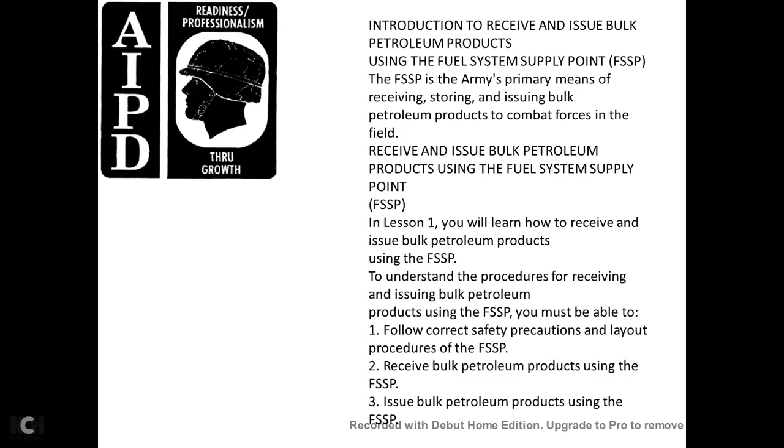be able to follow the correct safety precautions, lay out the fuel system supply point, receive bulk products using the fuel system supply point, and issue petroleum products using the fuel system supply point. Learning event number 1: how to follow the correct safety precautions.

Lay out the procedure. Safety precautions: whenever working with petroleum products, there is a risk of fire. The danger can be reduced by following the proper safety precautions during all phases of the operation. Primary precaution: prohibit smoking near the fuel system supply point. Post no smoking signs so that anyone entering or working in the supply point can see the signs immediately.

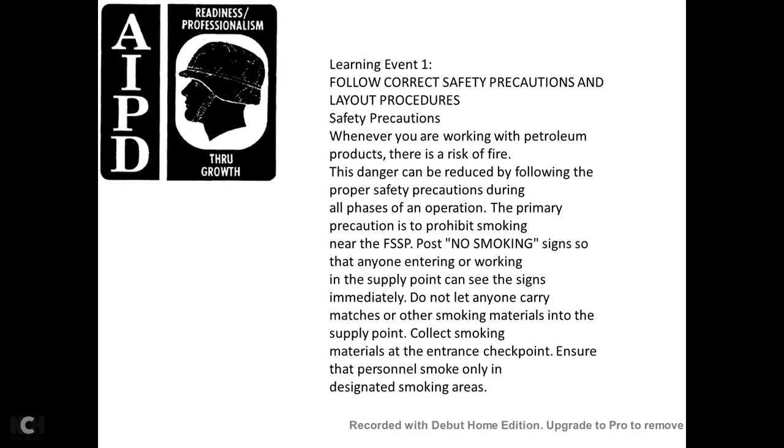Do not let anyone carry matches or smoking materials in the supply point. Collect smoking materials at the entrance checkpoint, and ensure that personnel smoke only in designated smoking areas. Place fire extinguishers at all receipt, storage, and issue points. All fire extinguishers must be operational and inspected daily. Ensure the equipment is grounded. Follow the proper grounding and bonding procedures during fuel transfer operations.

If enemy attack, an electrical storm, or fire occurs in the immediate area, stop operations immediately. Disconnect all the pump hoses and move all the vehicles out of the area. If possible, if a fire breaks out over the manhole of a tank vehicle or over the dome of a railway tank car, stop the transfer operations and close the manhole dome cover. This will extinguish the flames.

Do not permit welding, open flames, or lights other than approved explosion-proof flashlights within 100 feet of any receipt, storage, or issue operation. When operating the pump, if you see sparks, stop the pump and inspect all the grounding and bonding connections. Make sure the connections are bare with metal-to-metal contact. If you cannot find any faulty connections, look at the power equipment in the area to find the possible cause of the stray current.

Maintain a distance of at least 25 feet between tank vehicles during receipt and issue operations. Also keep all tractors coupled with the semi-trailers while the product is transferred. This allows the semi-trailer to be moved quickly in an emergency. The canvas top of the tractor must cover the driver's compartment while the vehicle is loading or unloading product. This keeps the inside of the tractor from being splashed with fuel.

Do not use a nozzle equipped with a locking device. If the nozzle is equipped with a locking device, disable the locking device before use. Ensure the nozzles are attended constantly during refueling. Take all precautions possible to prevent spills, using drip pans whenever the hose is being connected or disconnected, and repair all leaks immediately. If needed, replace defective hoses, gaskets, and valves.

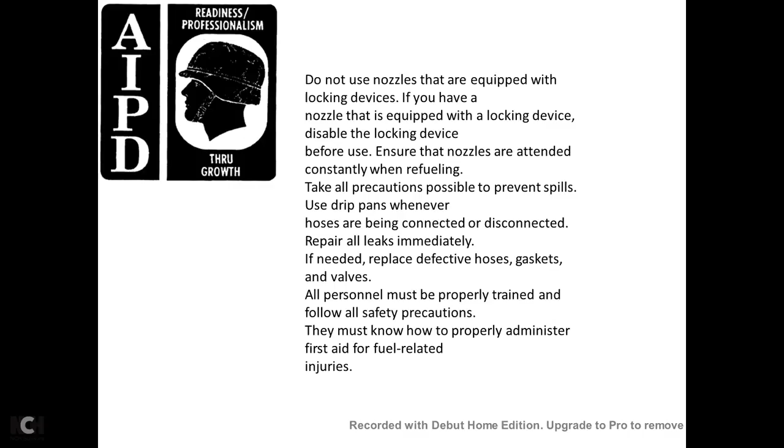All personnel must be properly trained and follow all safety precautions. They must know how to properly administer first aid for fuel-related injuries. Layout procedure of the fuel system supply point.

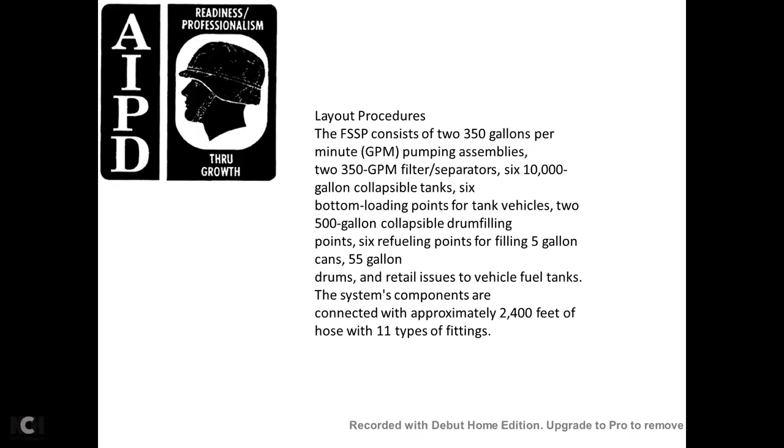It contains two 350 gallon per minute pumping assemblies, two 350 gallon per minute filter separators, six 10,000 gallon collapsible tanks, 6 bottom loading points for tank vehicles, 2 500 gallon collapsible drum filling points, 6 refueling points for filling 5 gallon cans or 55 gallon drums, and retail issue to vehicle fuel tanks, with system components connected with approximately 2,400 feet of hose and 11 types of fittings.

The fuel system supply point is designed to be flexible in layout. The system layout depends on the needs of the mission and the variables of the terrain. You must lay out the system and identify the components needed. For example, if your mission does not include the filling of 500 gallon collapsible drums, then you do not include the filling points in your layout.

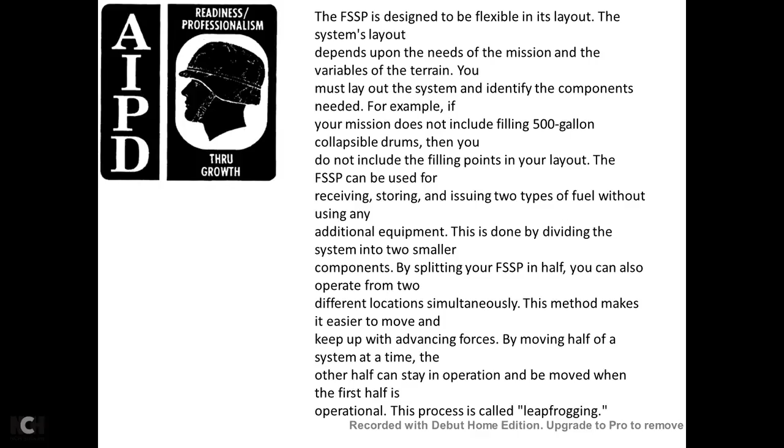The fuel system supply point can be used in receiving, storing, and issuing 2 types of fuel without using additional equipment. This is done by dividing the system into 2 smaller components by splitting your fuel system supply point in half. You can also operate at 2 different locations simultaneously. This method makes it easier to keep up with advancing forces by moving half of the system at a time. The other half stays in operation while the first half moves; this process is called leapfrogging.

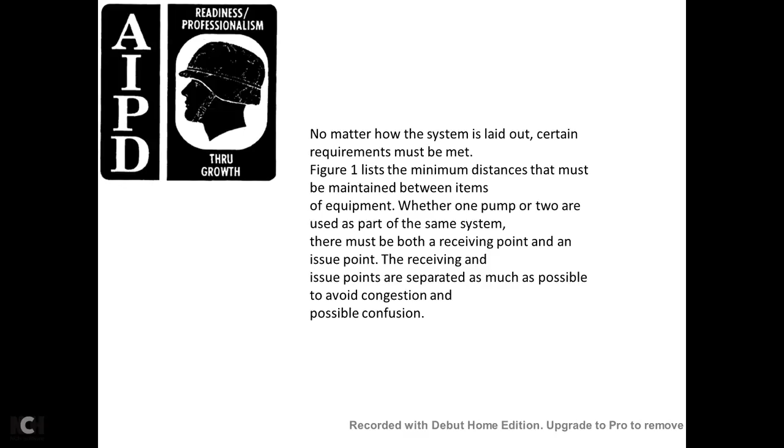No matter how the system is laid out, certain requirements must be met. Figure 1 lists the minimum distances that must be maintained between the items of equipment. Whether one pump or two are used as part of the same system, there must be both a receiving point and an issuing point. The receiving and issuing points are separated as much as possible to avoid congestion and possible confusion.

Figure 1 shows the usual distance between the components of the fuel system: supply point receipt manifold to receiving pump, 60 feet; receiving pump to manifold on the first tank, 60 feet; 10,000 gallon tank to 10,000 gallon tank, 40 feet; manifold of last tank to the discharge pump, 60 feet; discharge pump to the filter separator, 40 feet; filter separator to fuel servicing nozzle, 60 feet.

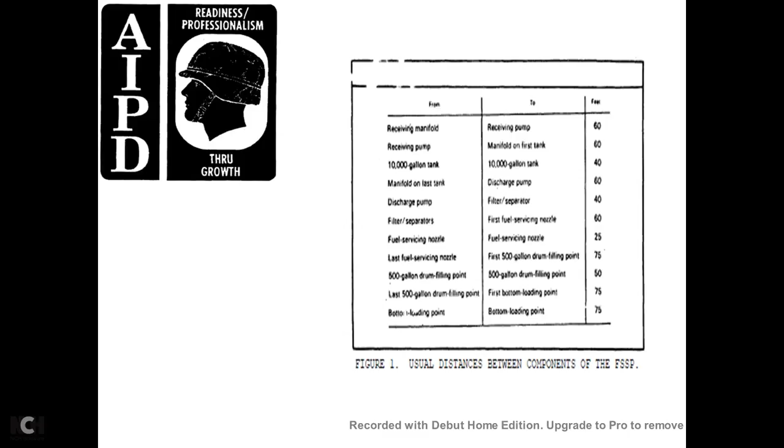Fuel servicing nozzle to fuel servicing nozzle, 25 feet; last fuel servicing nozzle to the first 500 gallon drum filling point, 75 feet; 500 gallon drum filling point to 500 gallon drum filling point, 50 feet; last 500 gallon drum filling point to the first bottom loading point, 75 feet; bottom loading point to bottom loading point, 75 feet.

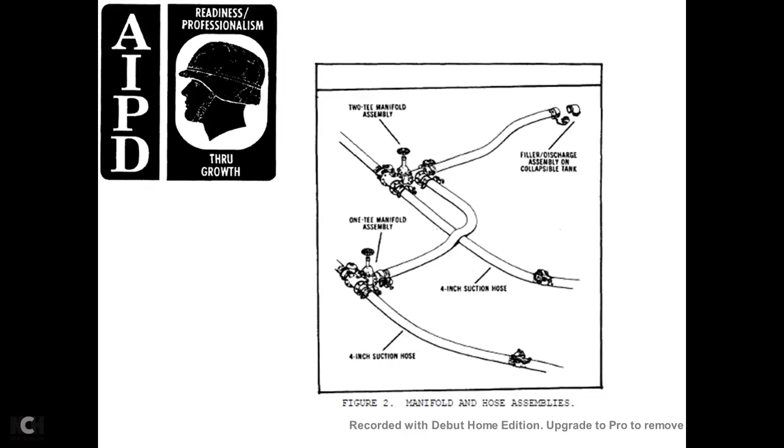The basic setup for the tank manifold remains the same regardless of the number of tanks used for the layout design. The manifold for each tank must be assembled so that fuel can be received and issued, because the 10,000 gallon collapsible tanks have only the filler discharge. The basic manifold for each of the tanks is shown in Figure 2. Figure 2 shows the manifold hose assembly with a two-tee assembly headed to the filler discharge assembly of the collapsible tank, over to the one-tee manifold assembly in 4 sections with two 4-inch suction hoses.

Various ways of laying out the complete fuel forward supply system are shown in Figure 3. Lay out the system the best way possible for the specific situation. After you decide how to lay out the system, you must prepare the areas where the tanks will be positioned. Pick up all the loose debris.

All the collapsible tanks will be surrounded with a firewall. The firewall must be large enough to contain the entire contents of the tank plus one foot of freeboard empty space. To meet this requirement, the firewall must be 26 by 26 feet inside. The firewall must be 3 feet high and 8 inches wide at the top of the berm. Figure 4 displays a berm in construction.

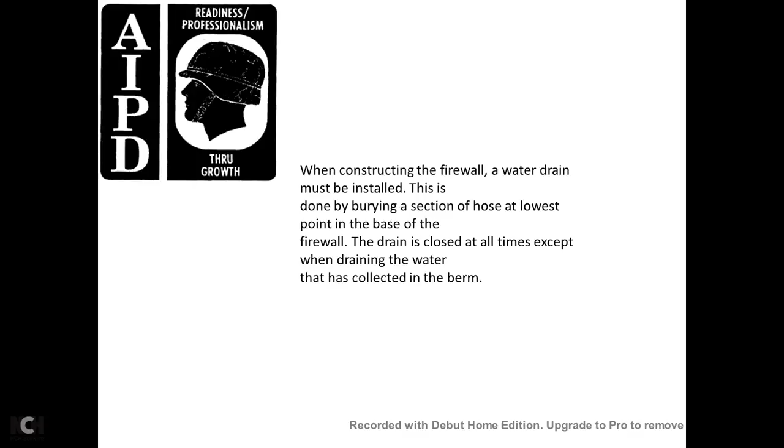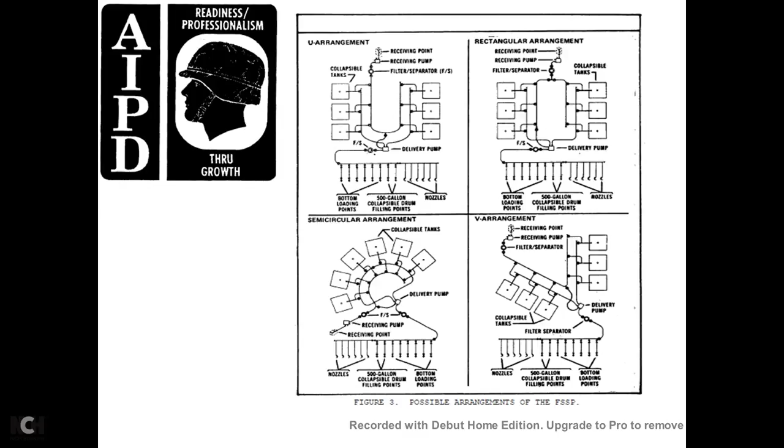All right, your semicircular arrangement goes from the receiving point and receiving pump to the filter separator, to the semicircular arrangement, back to the delivery pump and the fuel supply, going to the nozzles, 500 gallon collapsible drum filling points, and bottom loading points. The V arrangement is a receiving point, receiving pump, and filter separator to the V arrangement with the collapsible tanks, then to the delivery pump, to the filter separator, to the nozzles, 500 gallon collapsible drum filling points, and bottom loading points.

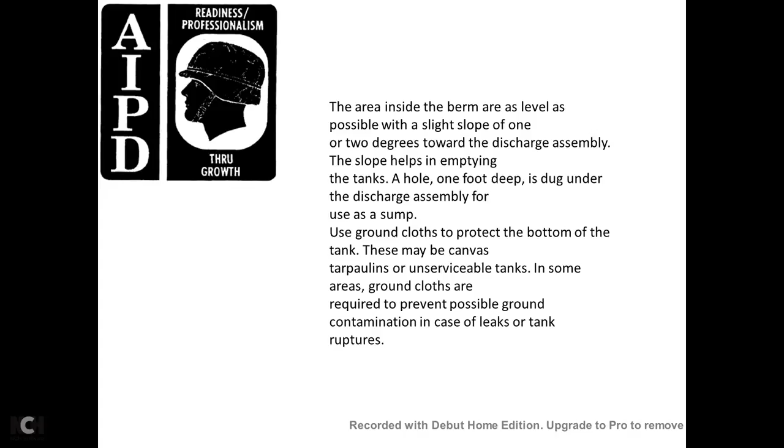The areas inside the berms are leveled, with a possible slight slope of 1 to 2 degrees toward the discharge assembly. The slope helps empty the tank. A hole 1 foot deep is dug under the discharge assembly for use as a sump. Use ground cloths to protect the bottom of the tank. These may be canvas tarpaulins or unserviceable tanks. In some areas, ground cloths are required to prevent possible ground contamination in case of leaks or if the tank ruptures.

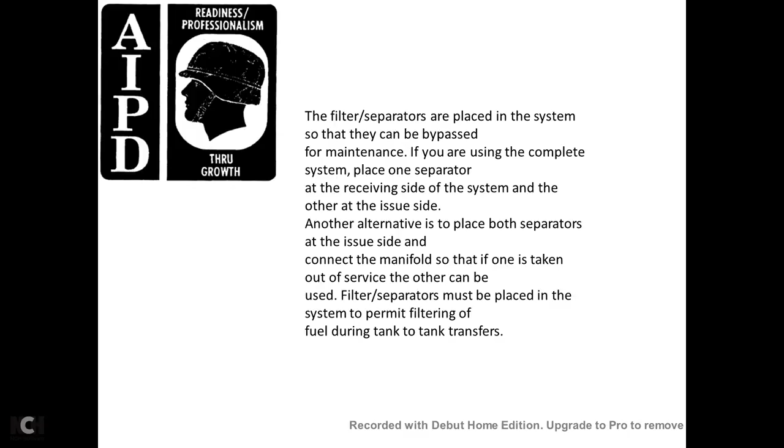Filter separators are placed in systems so that they can be bypassed for maintenance. If you're using the complete system, place one separator on the receiving side of the system and another on the issue side. Another alternative is to place both separators on the issue side, connected by a manifold, so that if one is taken out of service the other may be used. Filter separators must be placed in the system permitting the filtering of fuel during tank transfers.

When personnel are laying out the hoses for the system, ensure that they only remove the dust caps and plugs when ready to make the connection.

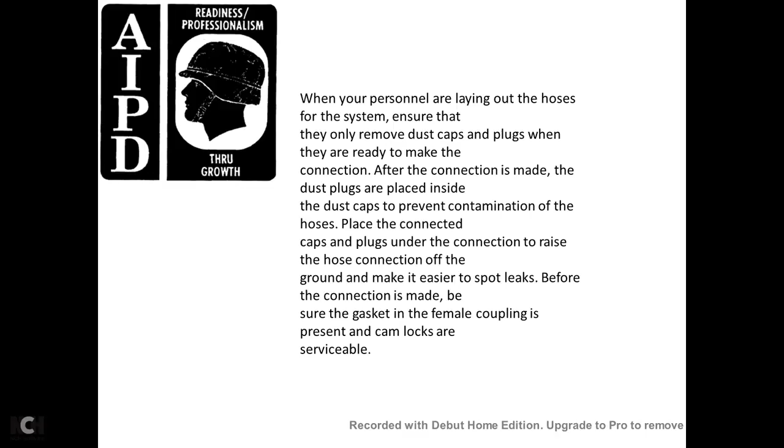After the connection is made, the dust plugs are placed inside the dust caps to prevent contamination of the hose. Then place the connected caps and plugs under the connection to raise the hose connection off the ground and make it easier to spot leaks. Before the connection is made, make sure the gasket in the female coupling is present and cam locks are serviceable.

Learning event 2: receiving bulk petroleum products. Follow the procedure to avoid interruptions. Prepare the receiving schedule before the products arrive. Know the type and amount of the product as well as the date and time of arrival before receiving the product. Inspect the pumps, filter separators, hose, valves, and fittings for cleanliness and good working condition. Check the collapsible tanks for cleanliness and damage, and available space for the product receipt. Do this before the product arrives at the location.

When the transporter arrives, position it so that no strain is put on the hose connection when spotting. If unloading more than one transport at the same time, make sure there are at least 25 feet between them. Bond and ground the transport. Compare the seal number on the transport with the number on the shipping documentation to detect tampering. If there's a broken seal or seals that do not match the shipping documentation, notify the proper authorities. Do not unload or use the product until it has been gauged, sampled, and tested.

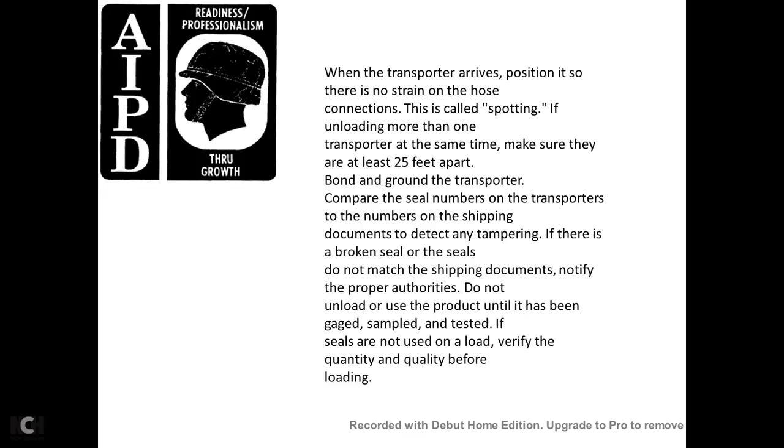If the seals are not used, verify the quantity and quality before unloading. Inspect the transporter for leaks. If the transporter is leaking, place a drip pan to catch the leak. Unload the fuel at once and be sure to clean up any spilled fuel immediately.

Unload tank vehicles. Before starting the unloading operation, make sure the vehicle and the major components of the supply point are bonded and grounded. Place the drip pan under the manifold of the vehicle before making the connection. Make sure that you have a fire extinguisher near the receiving point. Follow the safety precautions. Connect the suction hose to the discharge port of the vehicle. Assign someone to watch the level of the product in the vehicle. Make sure the manhole stays open during the operation.

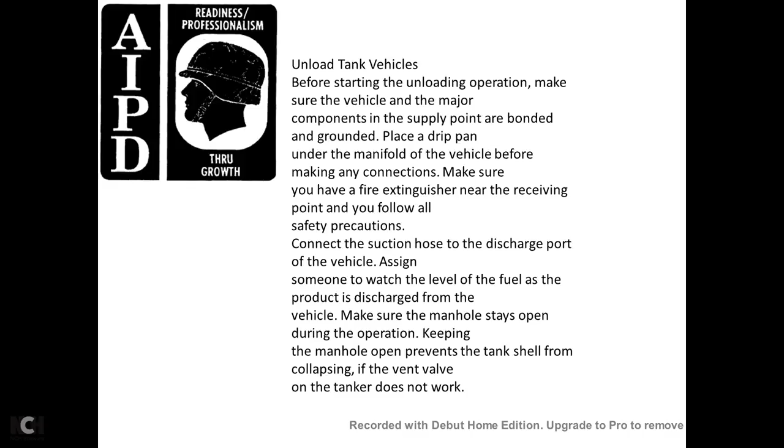Keep the manhole open to prevent the tank shell from collapsing if the vent valve on the tanker does not work. Open the discharge valve of the tank and the suction valve of the 350 gallon per minute pumping assembly of the fuel system supply point. Start the pump and idle at the appropriate speed for 3 to 5 minutes.

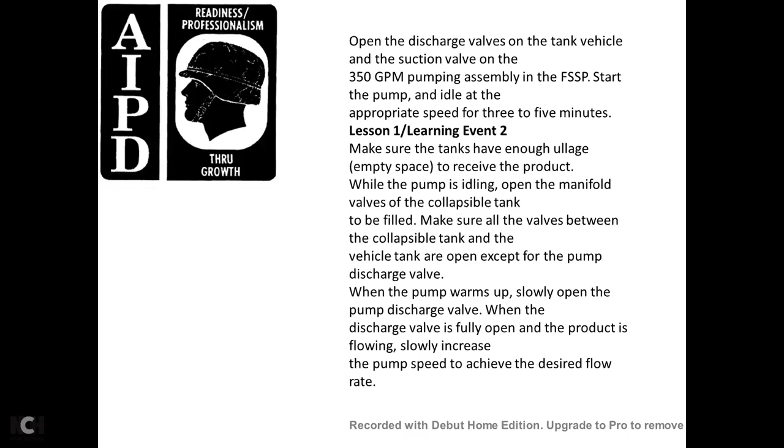Lesson 1, learning event 2 continued. Make sure the tanks have enough ullage, empty space, to receive the product while the pump is idling. Open the manifold valves on the collapsible tank to be filled. Make sure that the valves between the collapsible tank and the vehicle are open, except for the pump discharge valve. When the pump warms up, slowly open the pump discharge valve. When the discharge valve is fully open and the product is flowing, slowly increase the pump speed to achieve the desired flow rate.

While the tank vehicle is unloaded, check the hoses, valves, pumps, and receiving tanks for leaks. Place a drip pan under any leak and stop the operation immediately. Make any necessary repairs before continuing the operation. When the transporter is empty, idle the pump engine, then close the discharge valve and allow the engine to idle for 3 to 5 minutes before turning it off. Close the pump suction valve, close the manhole, and close all the valves. Disconnect the suction hose and the ground wire from the vehicle. Move the vehicle away and prepare for the next operation.

Unloading tanker cars: you may be able to set up the fuel system supply point close enough to the railroad track to receive product from railway tanker cars. This allows large shipments of fuel, which frees vehicles on the main supply route to move other materials. When receiving product from a railway car, use standard procedures for spotting railway cars. After spotting, set the brakes and chock the wheels. Place a sign reading 'Stop, tank car connected' between the rails at least 25 feet ahead of and behind the railway car.

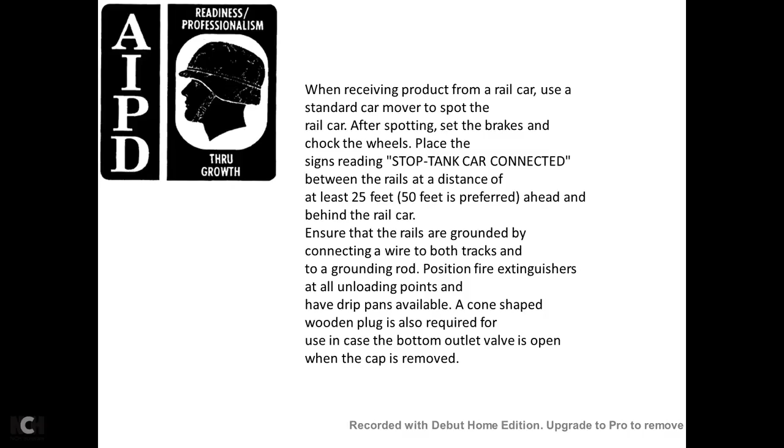Ensure the rails are grounded by connecting a wire from both tracks to the ground. Position fire extinguishers at all unloading points. Have drip pans available, and a cone-shaped wooden plug, which is required in case the bottom outlet valve is open when the cap is removed. When the rail tanker car is in position and grounded, make a quick inspection for leaks. Receive the railway car.

If you receive a railway car that is leaking, place a drip pan under the leak and unload the car as soon as possible. Perform preliminary steps to ensure that the product is suitable for use and has not been tampered with. Unload the railway tanker car through the bottom outlet valve unless the valve is broken, and unless the proper adapter for the railway tanker car is not available.

In this case, unload the car from the dome with a suction hose. When opening the manhole cover on the railway car, stand on the upwind side, avoid breathing the fumes.

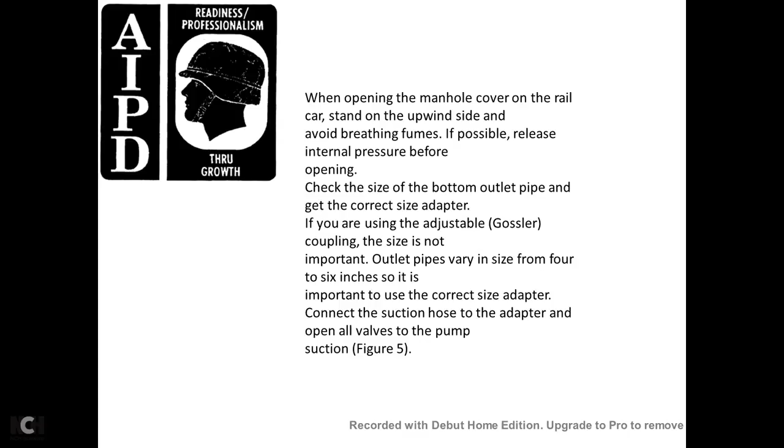Connect the suction hose to the adapter and open all the valves of the pump, as shown in figure 5. Open the pump suction valve, start the pump, and idle the pump 3 to 5 minutes while it is idling.

Open the valve between the pump and the discharge, receiving tank, having one person monitor the fuel level in the tank being unloaded. As the pump engine warms up, slowly open the discharge valve and increase the pump speed to the desired flow rate while transferring the product.

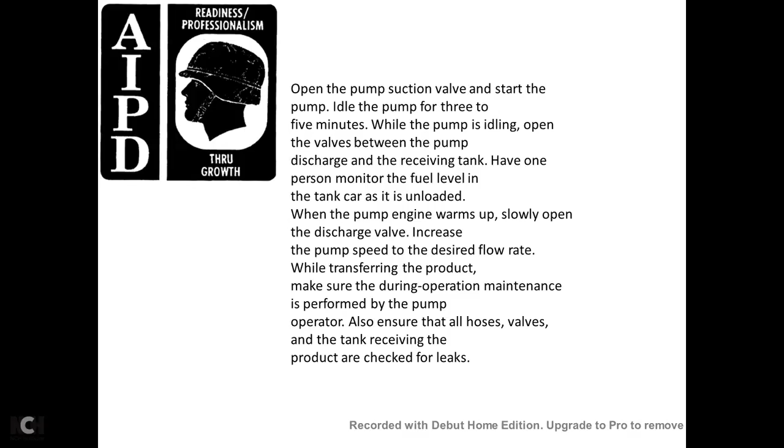Make sure that during operation, maintenance is performed by the pump operator. Also ensure that all hoses, valves, and tanks receiving the product are checked for leaks. If a leak is found during unloading, place the drip pan under the leak, stop the operation, and make the necessary repairs before resuming the transfer operation.

When the railway tanker car is empty, slowly bring the pump engine to idle speed. Close the pump discharge valve and allow the pump to idle for 3 to 5 minutes before shutting it off. Close the suction valve and close the bottom outlet valve of the railway tanker car.

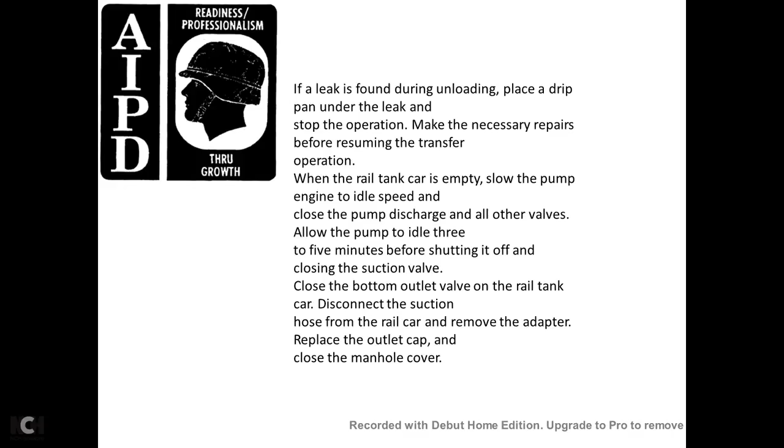Disconnect the suction hose from the railway car, remove the adapter, replace the outlet cap, and close the manhole cover. On all sides of the railway car, diamond-shaped cards say flammable. Remove the cards and replace them with dangerous empty cards. Some of the cards are printed on both sides, in which case flip them over.

Disconnect the ground wire from the rail car. Release the brakes and remove the chock block. Remove the car from the transfer area and notify the proper authorities that the car is ready to be removed.

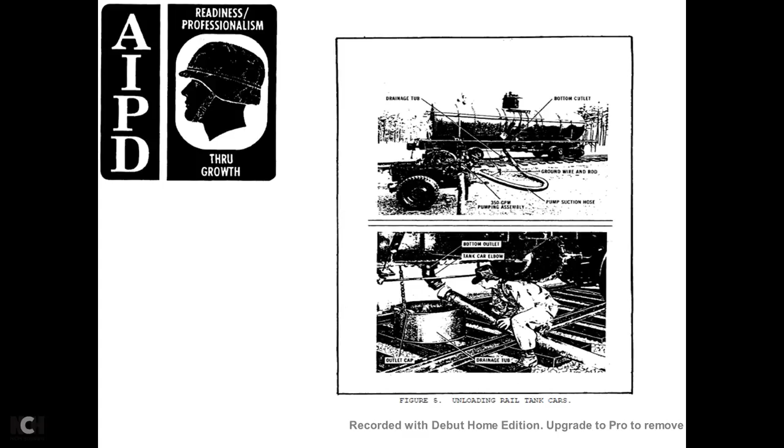Figure 6 shows unloading the railway tanker cars. The top picture shows a damaged drainage tube, a 350 GPM pumping assembly, a pump suction hose, a grounded wire and rod, and a bottom outlet. The bottom outlet has a tanker car elbow and the drainage tube connects into an outlet cap and a drainage tube.

Receipt of the product through the assault hose line. In some cases, the receipt of the product for your fuel system supply point uses an assault hose line, as with the railway tanker, which has the advantage of freeing up the main supply route.

For other types of supply, there's an added advantage of being able to receive more product into your system, assuming there's an adequate source at the other end of the hose line. The assault hose line usually connects directly into the manifold system on the discharge side of the receiving pump.

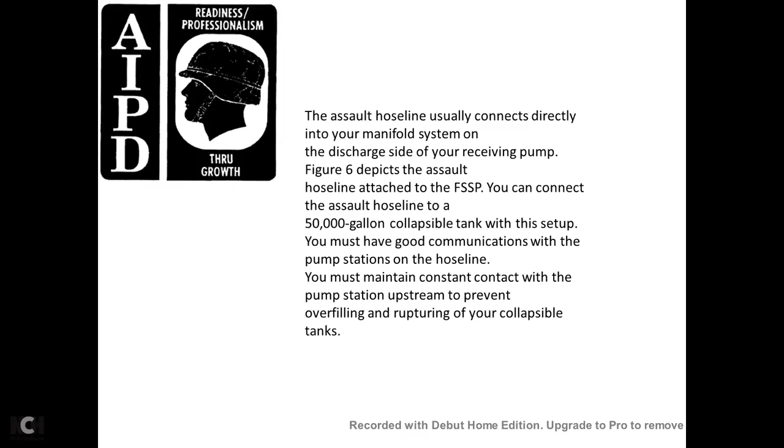You will receive pumping orders before the operation begins. Pumping orders tell you when the operation begins, how much fuel you will receive, and how long the pumping operation will take. Upon receiving the pump order, ensure that you have enough ullage for receiving the designated quantity.

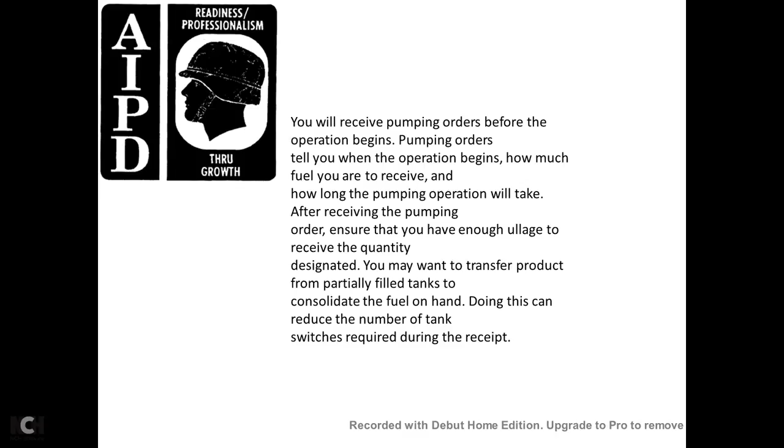You want to transfer the product from partially filled tanks to consolidate the fuel on hand. Doing this reduces the number of tank switches during the receipt. Once you have decided which tanks are to receive the product, you can determine the valves that need to be opened. Remember that when switching tanks, you open the valve to the next tank before closing the valve to the first tank. Failure to follow this procedure results in overfilling or rupturing the tank.

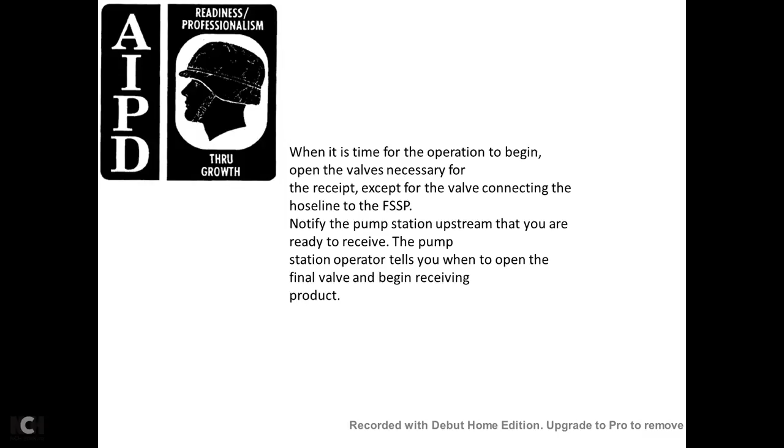When it is time for the operation to begin, open all valves necessary for the receipt, except for the valve connecting the hose line to the fuel system supply point. Notify the pump station upstream that you are ready to receive the product. The station operator tells you when to open the final valve and begin receiving the product. When the product starts arriving at the fuel system supply point, check hoses and valves for leaks.

Observe the collapsible tank to be sure that it is receiving the fuel. Send out a patrol to inspect the hose line for signs of leaks, tampering, or sabotage.

If you receive a large amount of fuel and the fuel system supply requires more than one tank, once the receiving tank is almost full, open the valve necessary to start the flow of product into the next tank so product flows into both tanks. Wait until the first tank is completely filled before closing its valve to allow flow into the new tank. Continue in this manner until you have received the entire quantity.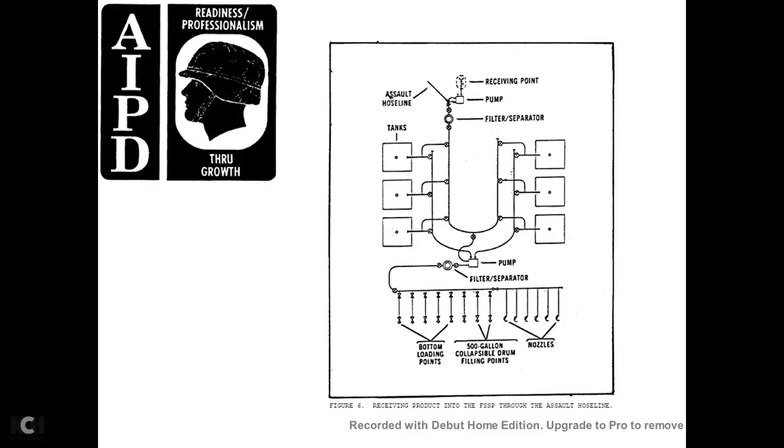Figure 6 shows the product moving from the forward supply point through an assault hose line to the receiving point at the pump, through the assault hose line and filter separator to the tanks, and then into another loop with a pump and filter separator to the bottom loading points, 500-gallon collapsible drum filling points, and nozzles.

If at any time during the receipt the enemy attacks or another emergency occurs, notify the pump station operator to shut down the operation immediately. After the receipt is completed, close all valves, perform after-operation maintenance, and prepare for the next operation.

Learning Event 3: Issuing Bulk Petroleum.

Prepare an issue schedule before the transporter arrives at the fuel system supply point. Start by telling your customer what type and how much fuel you have on hand, then tell the customer when to pick up the product at your facility. If your transporter is delivering the product, tell the customer when to expect the delivery so he can be prepared for its arrival.

To avoid delays and interruptions, schedule your issuing. In other words, do not have more transporters at your supply point than you can handle at one time. Also make sure you have enough product on hand to fill all the requests. Inspect your pumps, filter separators, collapsible tank hoses, and manifold valve fittings to make sure they are free of leaks and contamination.

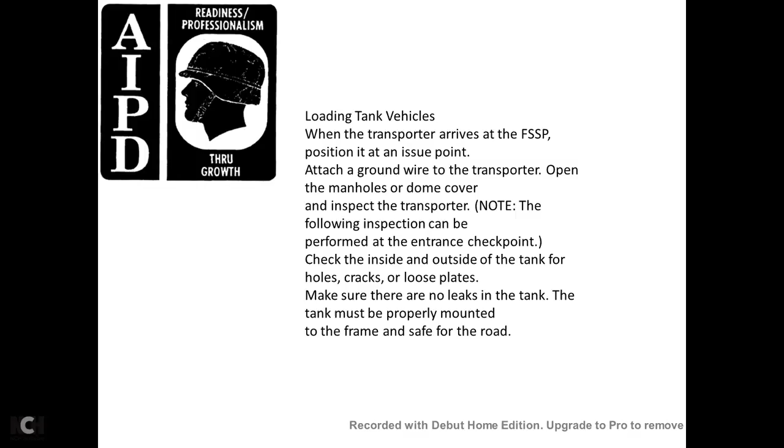At the entrance checkpoint, check the inside and outside of the tank for holes, cracks, or loose plates to make sure there are no leaks. The tank must be properly mounted to the frame and safe for the road.

Inspect the interior of the tank. If you see residues such as rust, sand, or dirt, have the transport rejected and cleaned. Check the interior of the tank for foreign objects such as tools, bolts, or old seals, and have authorized personnel remove any objects from the tank.

Connect the discharge hose to the receiving port of the vehicle. Three soldiers are needed to load the tank vehicle. Assign one to watch the product as it enters the tank so you do not overfill the vehicle. In addition to the person on the vehicle, there must be one person at the vehicle's valves and one person at the pump. Coordination between them is important to avoid overfilling.

Once the receiving valve of the vehicle and the manifold valve of the collapsible tank are set to supply the product, make sure all other valves between the collapsible tank and the tank vehicle are open. Open the suction valve of the 350 gallon per minute pump assembly, start the pump, and idle it 3 to 5 minutes to allow it to warm up. Then open the discharge valve of the pump slowly.

Increase the engine speed to obtain the desired pump rate. Pump at that rate until the vehicle tank is three-quarters full, then reduce the engine speed and continue pumping until the vehicle is full. Idle the pump and close the discharge valve, being sure to allow the pumping engine to idle 3 to 5 minutes before shutting it off.

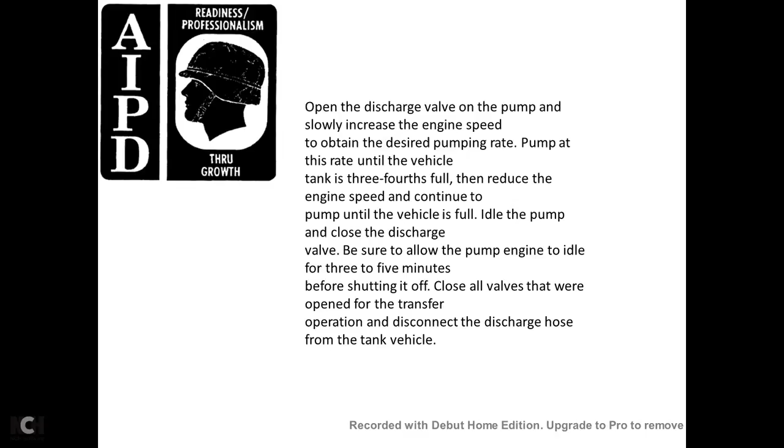Close all the valves that were opened for the transfer operation, and disconnect the discharge hose from the tank vehicle. The product must stand for 15 minutes.

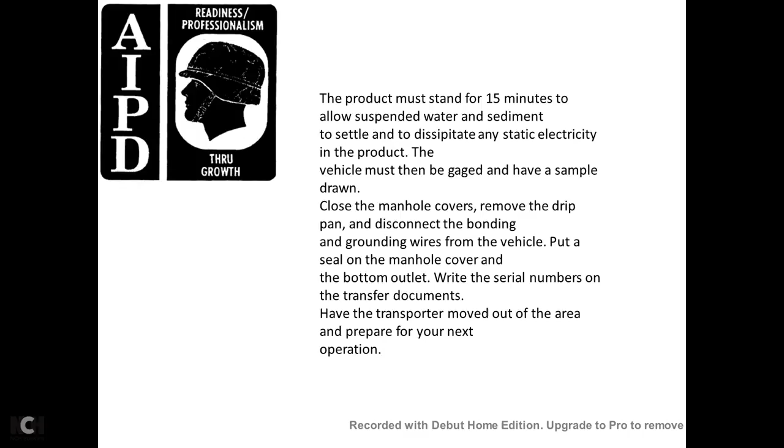Allow the suspended water sediment to settle and dissipate the static electricity in the product. The vehicle must then be gauged and have a sample drawn. Close the manhole cover, remove the drip pan, disconnect the bonding and grounding wire from the vehicle, put a seal on the manhole cover and the bottom of the outlet, and write the serial numbers on the transfer documentation. Have the documents, move the transporter out of the area, and prepare for the next operation.

Loading railway tanker cars may be required for issuing products into railway tanker cars for your fuel system supply point. The advantage is being able to move large quantities of fuel to a forward location without adding traffic on the main supply route. Always load tanker cars through the bottom outlet unless the bottom outlet is broken and correct adapter fittings are unavailable.

When unable to use the bottom outlet, load the tanker car through the dome. Loading through the bottom outlet is far better because it prevents vapor formation, reduces static electricity, and protects the fuel against contamination from outside sources. Follow the safety precautions outlined in Learning Event 2.

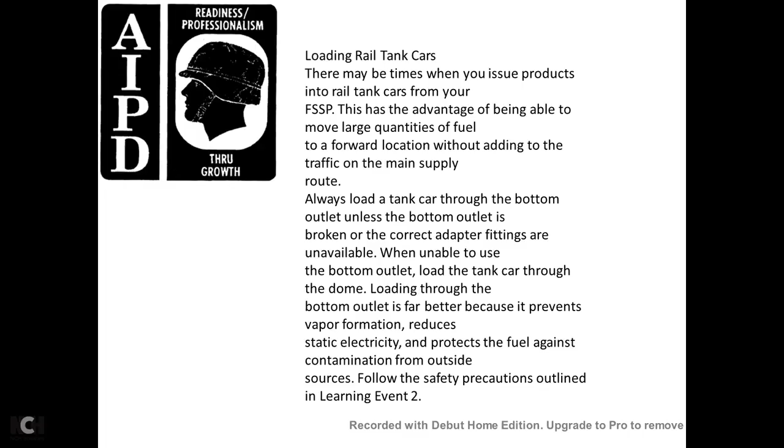After you inspect the tanker car and are assured of the conditions, ensure the track rails are properly bonded and grounded. Inspect the mechanical or cable connections, make sure it's secure, and make bare metal-to-metal contact between the rail and car. All major components with the supply point system must be bonded and grounded. Have a fire extinguisher near the tank car, making sure it's easy to see and reach.

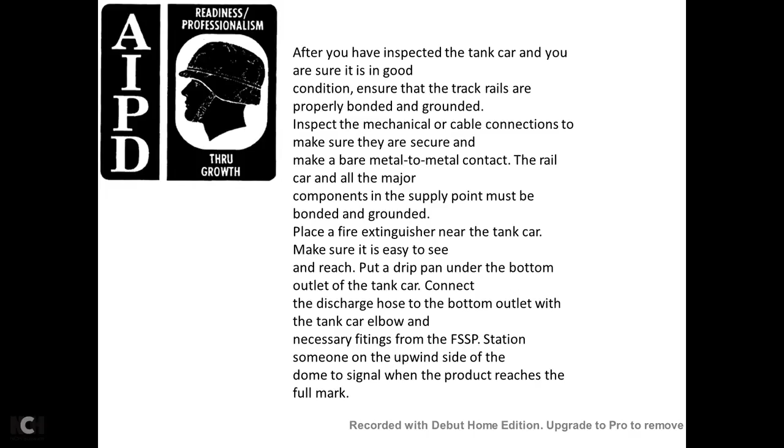Put a drip pan under the bottom outlet of the tanker car and connect the discharge hose at the bottom outlet of the tanker car elbow, using the necessary fittings from the fuel system supply point station. Someone on the upwind side of the dome should signal when the product reaches the full mark.

Open the bottom outlet valve of the tanker car, the manifold valve of the collapsible tank supplying the product, and make sure all valves between the tank car and the collapsible tank are open. Open the suction valve of the 350 gallon per minute pumping assembly and start the pumping engine, allowing it to idle for 3 to 5 minutes.

Open the discharge valve of the pump to increase the flow to the desired rate. Have the person on the tank car check the product level in the rail car to avoid overfilling, and never allow them to put their head inside the dome of the tank.

Whenever the tanker car is three-quarters filled, reduce the pumping rate and continue pumping until the product reaches the fill mark. If the tanker car has no fill mark, fill it to the top of the tank shell. Idle the pump engine while quickly closing the discharge valve and the tank car bottom outlet, allowing the pump engine to idle 3 to 5 minutes before turning it off.

Next, close the manifold valve and the collapsible tank suction valve on the pump. Close all other valves that were opened to transfer, then disconnect the discharge hose and the elbow adapter from the tanker car.

Replace the bottom outlet cap and inspect the gasket. Replace the gasket, and afterward the product must stand for 15 minutes to allow suspended water sediment to settle and dissipate any static electricity in the product.

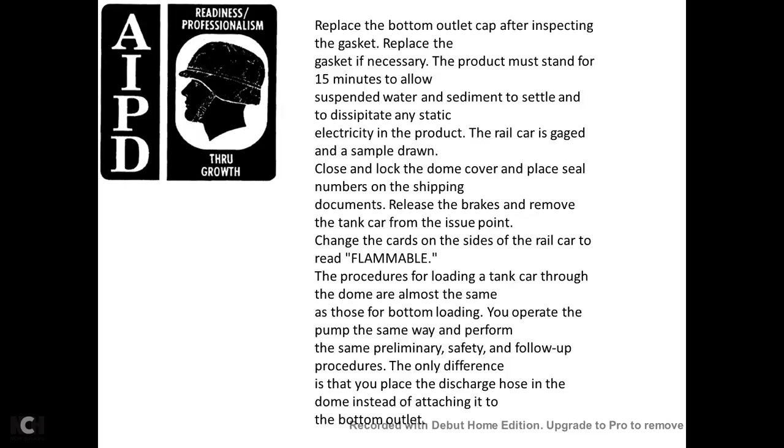The procedure for loading the tank car through the dome is almost the same as loading through the bottom. You operate the pump the same way and perform the same preliminary safety and follow-up procedures. The only difference is that instead of attaching the discharge hose to the bottom outlet, the hose is placed through the dome and almost touches the bottom of the tank.

If you do not put the hose in far enough into the tank, the product splashes and gives off an excessive amount of vapor, creating a potential fire hazard. Make sure there's no strain on the hose or it may move and come out of the tank during the transfer operation. Always station someone on the dome to monitor the hose and signal when the tank is full.

Start the filling at a reduced rate until the end of the hose is completely submerged in fuel. Wait at least 5 minutes after filling stops before removing the hose. This reduces the chance of static electricity arcing when the hose is removed from the fuel.

And that is receiving and issuing petroleum products using a fuel system supply point, subcourse QM5025, edition 6, AIPD.